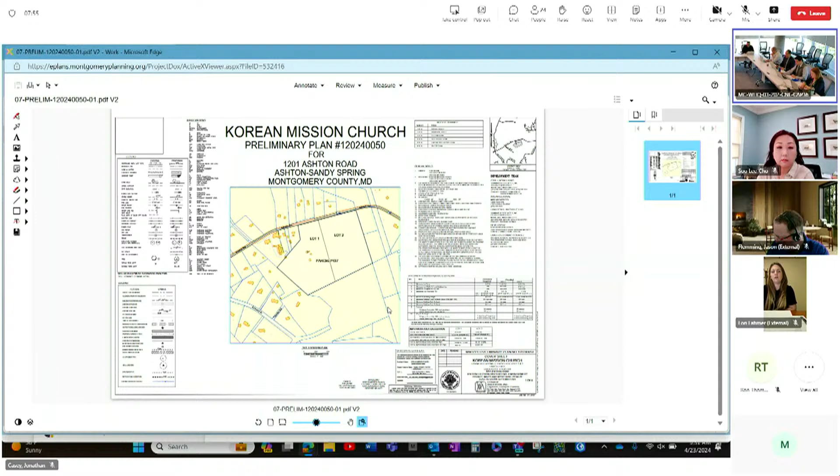Good morning. As already stated, I'm Jonathan Casey with Up County Planning. This is Korean Mission Church. The property is located on 108, almost to the Howard County line. Just a quick visual - this application is to subdivide the existing property into two lots, one for an existing house on well and septic, and one for the Korean Mission Church.

First off, I want to clarify on my comments, and in general, that the daycare use associated with the church does not require a conditional use, contrary to my interpretation. DPS, I believe, is on the line, and they can speak a little more to that if you'd like.

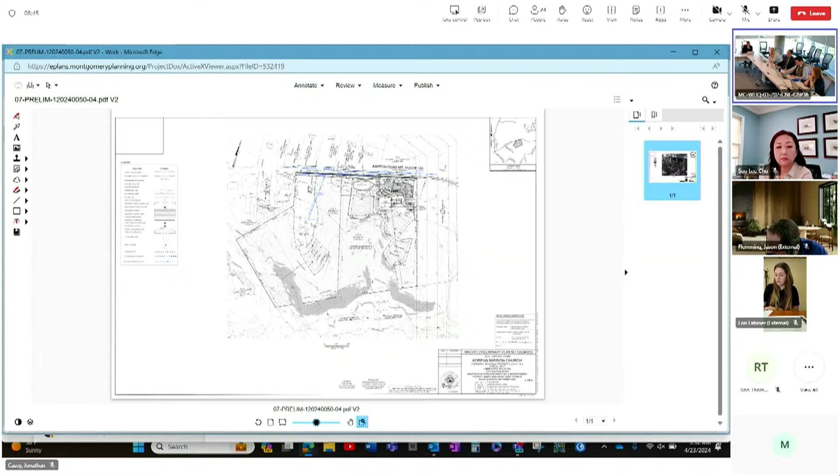It's pretty straightforward. The existing house is being retained, new septic established, and then a new church built on this lot. I would say the two big ticket items are, one, the building placement. Staff is requesting that the building be pushed up further towards the road, and possibly shifting the pavilion area so the buildings are a little more prominent on the road. We do have some very preliminary sketches in the works right now - very, very conceptual - and I will distribute those in the next day or two.

The other item is the existing graveyard. There will be some additional work associated with that graveyard. As you go forward, you'll need to coordinate with Brian Crane and go through the process that's established for delineating burial sites.

With that, I'll pass it to, I believe, Sue will be doing the speaking.

You're on mute. Yep, I got it. Good morning. Sue Lee Cho with Bregman, Berbert, Schwartz, and Gilday on behalf of the applicant, Korean Mission Church.

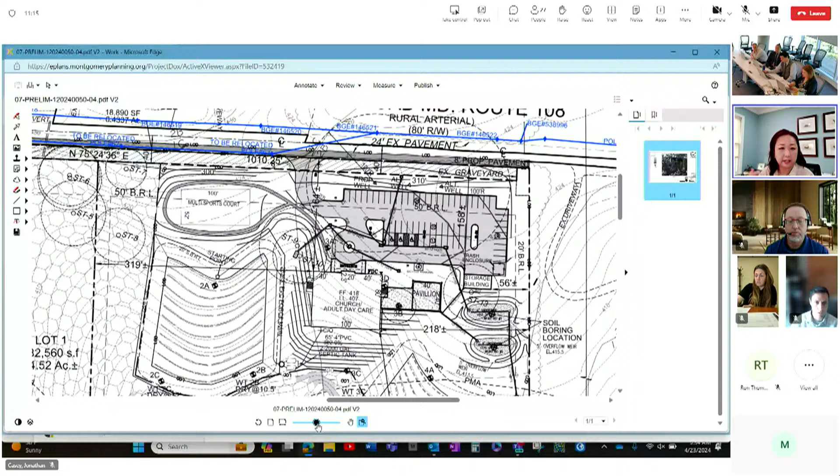On that issue, I'd like to say the team had reasons for the placement on the site, the building the way it is, and we understand the comment about trying to push it toward the street. The topography of the site allows, based on the placement, to minimize the height of the building, the church building, as viewed from the street. We believe setting it back from the street would allow for screening and would be more in character with some of the comments we're getting on the master plan about the rural nature of this area, trying to balance those interests. It would also allow for a basement level, a lower level below grade at the front of the property, but exposed on the backside.

That would facilitate the church use. As you push the building toward the street, we don't have that ability to use the grade to our advantage. As you can imagine, if you construct the parking lot behind the building, we run into the issue of retaining walls and significant increased cost of construction, making this project more difficult and costly to build. So there are reasons why the parking lot is located where it is, toward the street. But we understand the need to screen it and shield the view of the parking lot as much as possible. Those are our perspectives, but certainly we'll look at the sketch you all are preparing for us. This is not an urban environment, so we thought setting the building back from the street would not be as much of an issue in this part of the county.

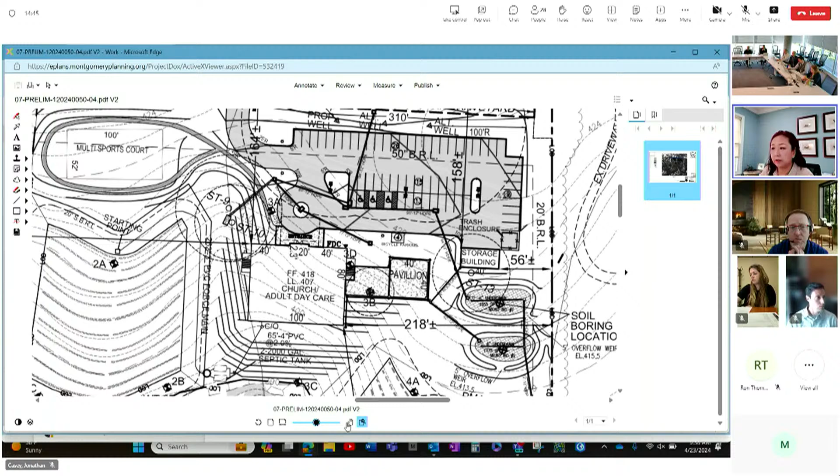Okay, great. The other kind of grouping of comments that we noticed, we just would like to use the time today to maybe start the conversation. We certainly will not conclude the issue. We noticed the transportation, kind of the frontage improvement comments with the side path, street buffer, and state highway comments - we are trying to reconcile some of them. The numbers we saw did not marry up exactly with each other on some of the comments. There was a 10-foot side path versus a minimum 6-foot sidewalk, that kind of thing.

So I don't know, Jonathan, if we should have a separate meeting to hash out the cross-section. I know your comments, you had a number of places where you said we need a cross-section. We agree. We need to come to terms with the cross-section.

Yeah, and I think you probably noticed there are a bunch of comments that repeated themselves probably 4 or 5 times. That was not emphasis added, that was just E-Plan's work. But yeah, we can discuss the actual cross-section. It would probably be best just to consolidate the meeting instead of having multiple meetings, but again, I can talk to our transportation staff and DOT, and we can work out the details as far as any conflicts that you may have seen, and then we can hash all that out.

I do have, I think I have Nick Dribbin, Lenhart guys. Are you guys on? Yes, I'm here. Okay, Nick, did you want to add anything to the state highway comments on the acceleration, deceleration?

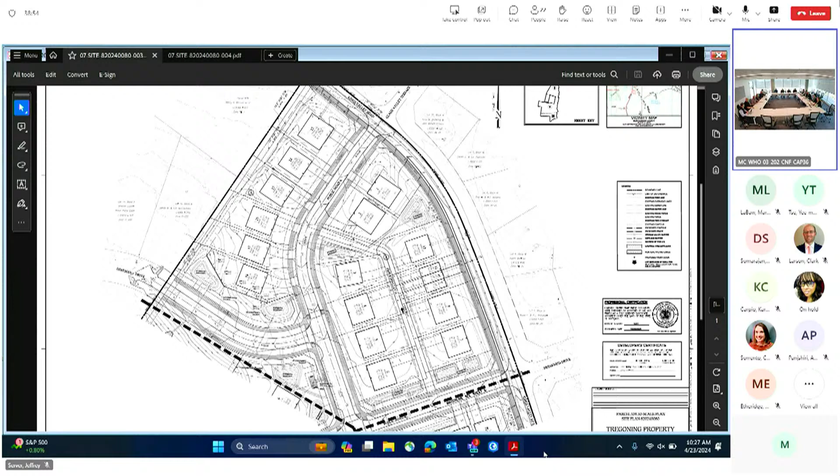All right, anything else? Good, I'll follow up. Good to see everybody. Thank you. Thank you all very much. Sorry, we're late.

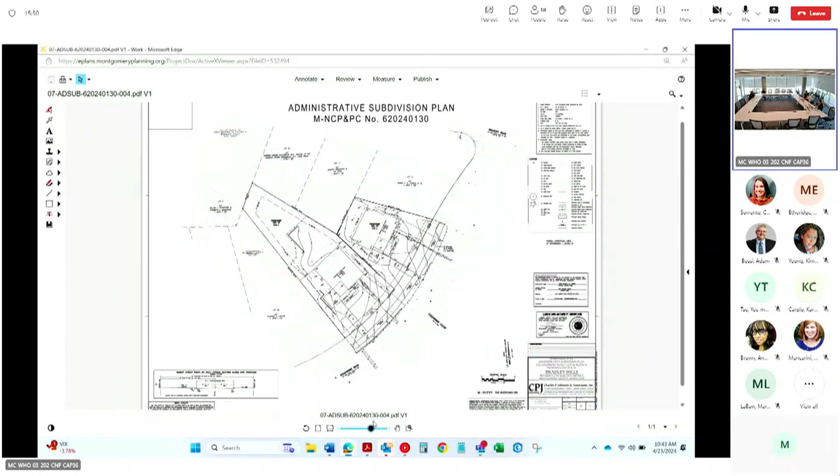Then there's an extensive letter prepared by the community that you received yesterday morning. Some of the concerns overlap with the DRC comments. There's some other points raised, such as exploring the extension of the side path to the corner. Our transportation planner has been looking into that with some of the other lead agencies. In general, some cleanups are needed, but I think the comments were pretty straightforward. Happy to answer any questions or get into any details you'd like.

I just have a few to go over here. We have talked in the past with other reviewers regarding noise studies. That's going to be probably a 4 to 6, maybe 8-week process to go through. So as far as resubmittal time, maybe an extension might be needed for that. That discipline seems to be very busy right now. We have been quoted 16 to 18 weeks from other companies, but that is in progress.

As you brought up, the main thing is the side path and the impacts to the specimen trees along Goldsboro Road. I need clarification on where that can go. Even moving it back, we're still in the structural root zones of those trees. Obviously, we want to save trees as much as we can. These are specimen trees out here. But even moving it back, I don't see how we're limiting the disturbance to those trees.

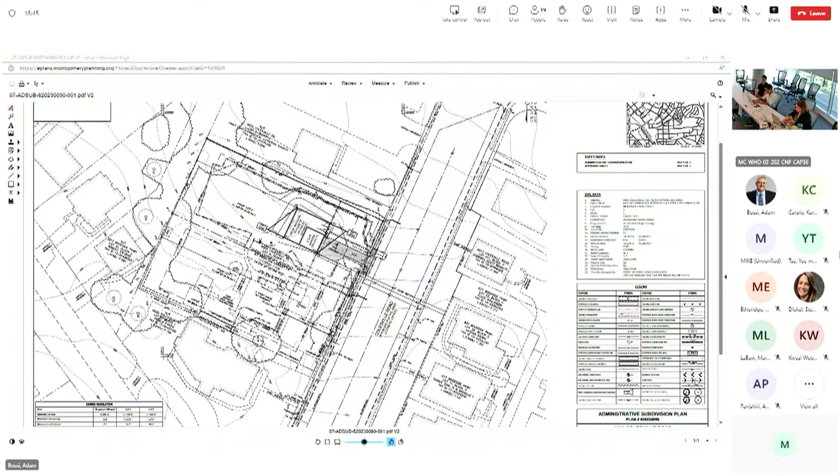Mike asks if Katie is available right now. Mike notes Katie Mancarini is in the meeting but doing double duty, so she might not be able to join at the moment. They agree to circle back to that question.

Second question is environment. There's a couple environmental questions. The first is regarding change mark note 3 about the removal of parking spaces. My question is, on this particular subdivision plan, would it be sufficient to just point out that the existing parking will be removed at the time of permitting, or prior to permitting, of any new future construction?

This is Marco Fistrati, the environmental reviewer for this project. The master plan has language about reducing impervious surfaces or increasing permeable areas. The site has extensive parking, and I think it's generally in the LOD. There's a prepared specification I could send you. Ideally, you would have that on the plan. That answers your question.

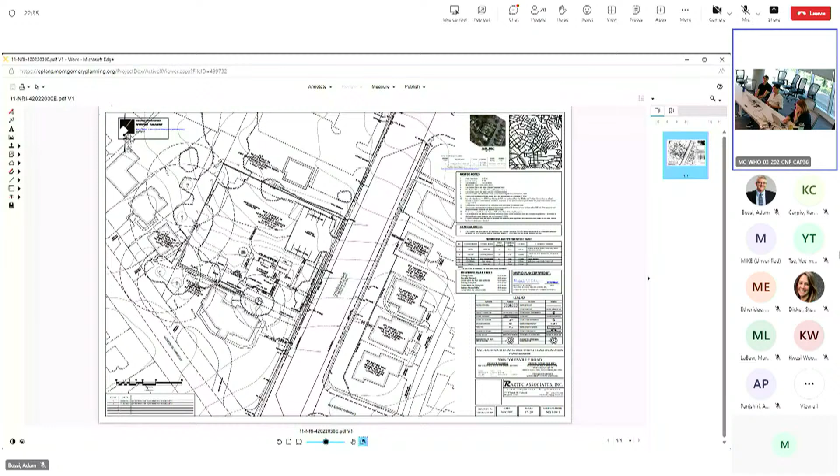The master plan also has language about applying urban forestry practices and exploring ways to preserve trees through the subdivision process. On the north boundary, in particular, that's where the 25-inch maple is, along with a row of cherry trees near the LOD as proposed. We'd like to explore some adjustments to the LOD or other measures that might help preserve those trees if possible.

So what would you like to see in terms of moving this particular plan forward—just show it on the administrative subdivision plan when we revise it? Right, as part of the plans they would ideally show the arborist recommendations and any fine tuning of the LOD or other measures that might be recommended. Okay, all right.

Hey Mike, this is Katie, sorry I missed the first half. It sounds like you have some questions about maybe the side path or some of the frontage improvements. Hi Katie, how are you? My question was regarding your comment about having, on Colesville Road—I know we have to do a dedication—an 11-foot side path and 8-foot street buffer. Given that this area is pretty well developed, how would that connect to existing facilities or improvements? How would that tie in? Is it more obstructive to have that, or I'm not sure what the end result would be. I just wanted your opinion and some feedback.

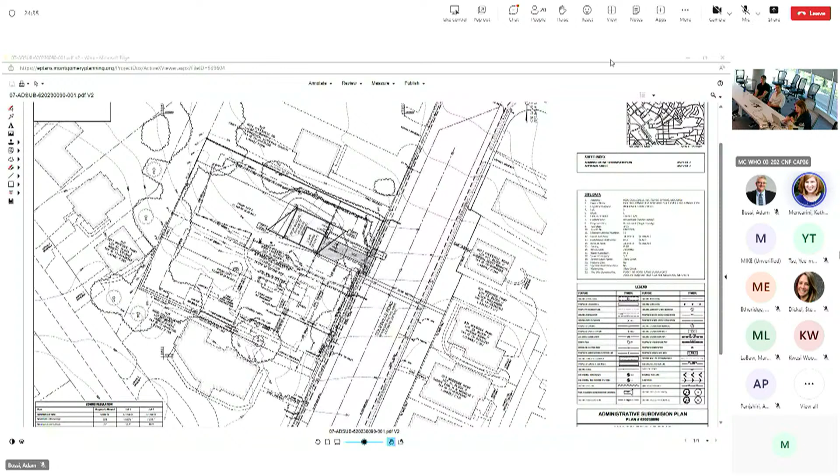Absolutely, this is a great question—forgive me, I might give you more information than you're looking for. In 2021 we adopted the complete street design guide, which set certain frontage improvements based on street classifications. Colesville Road does have a sidewalk today, but it's insufficient, and we consider it not safe and comfortable for the goals we're trying to achieve.

So when new development comes in, you have to make a finding for compliance with master plans, and the complete streets design guide is treated in that same way. And that's why the comment was made.

So what you would be doing is installing the side path, and it would tie into the sidewalk on either end of your property. So it does need to tie into the existing facility, but you would remove that portion of sidewalk along the site frontage and replace it with a side path. So we'd be looking for that on your resubmittal and how you're achieving that.

Okay, thank you. My pleasure. Thanks for the question. I'll get back to my next question about environmental.

Marco, you say a noise analysis is needed due to proposed residential use along a major roadway corridor. Right, per the noise guidelines for development in Montgomery County, when you're proposing new residential uses next to a busy roadway, there's certain definitions, but this certainly meets it. It's a major roadway and you're fronting right next to it. Whereas if you were a certain distance away, you wouldn't be subject. But a new house that close to such a major roadway, you're subject to the noise guidelines.

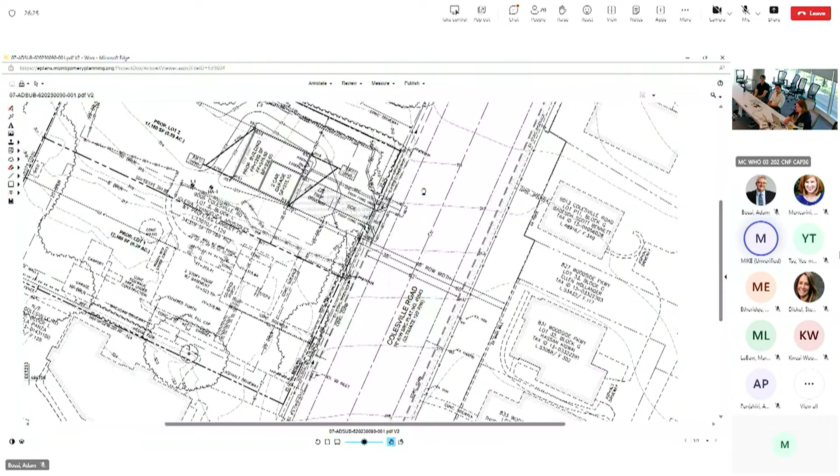Okay, is that something that's needed at subdivision, or something they could present when they do their permitting? It would be something we'd be looking at as part of the subdivision, and then there'd be a standard set of conditions, standard conditions of approval related to noise, recommended for the project.

Okay, my next question is from Adam. On your comment about checking maximum allowable lot coverage with residential infill, my understanding has always been that when you go through subdivision, the requirements you're supposed to meet are the regular zoning requirements, not infill requirements.

That would be in situations where, and this is my understanding, you're building or constructing something outside of the subdivision regs. Like, for example, if you don't need to go to subdivision and it's already a recorded lot, prior to 1978, I guess, recorded prior to 1978. Could you confirm that so we know where we stand?

Yeah, I think that's another great question, one that I don't have an answer for you right now, but I'd have to check into it and get back to you. I haven't had the question posed to me before, so I'm not sure what the answer is. If one of my colleagues does, they can feel free to chime in. Otherwise, I'll follow up with you on that one.

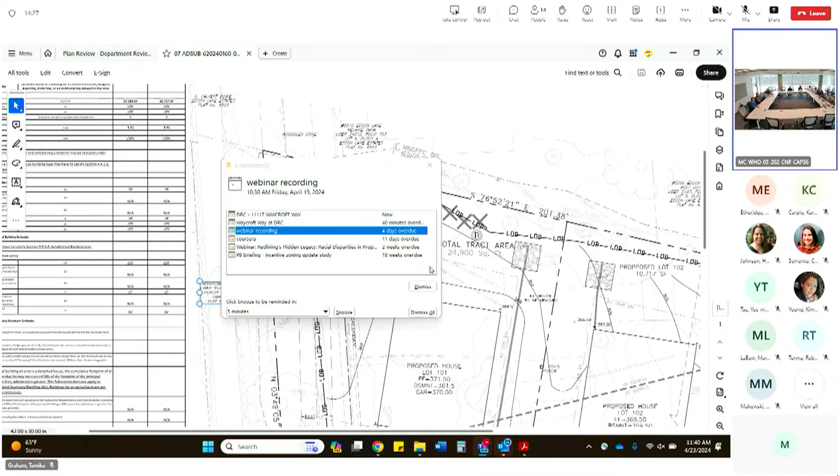I'll first start with the project schedule, just so we make sure we get the dates on everyone's radar. This will require another submission, due May 13th. For the agencies online, the letters would be due May 28th. And then we had a date saved for the planning board, which would be June 27th.

This is likely to be deferred to the planning board because of the comments we've already received, switching from the administrative review to planning board review. So June 27th. Just a couple of comments that I'll highlight.

From a zoning perspective, we do concur that what you're proposing for the 2 lots is consistent with zoning. You are showing that you're preferring to use the established building line instead of the front setback from the zone, which is fine, but we're just asking that you show the adjacent properties that you're using to establish that setback.

I think some of the other main things we wanted to highlight are with the transportation and the connectivity. So you probably saw a couple of comments from different folks about the ownership of the road. It is publicly owned, privately maintained, so we do need to have that consistent across all of the sheets.

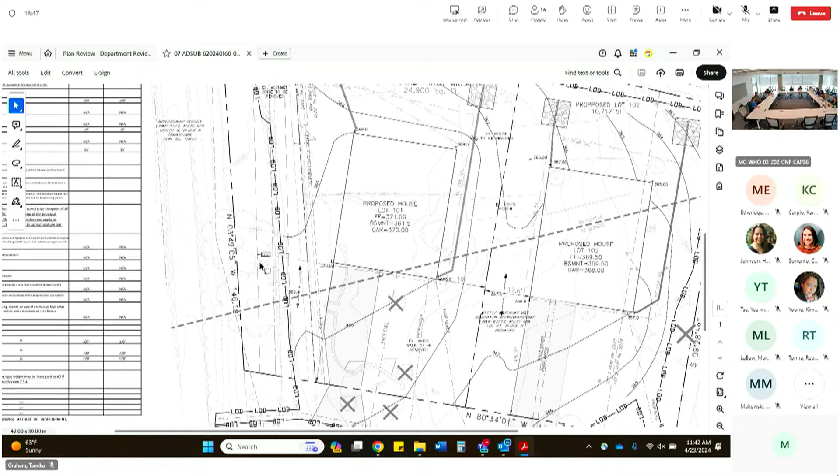We also noted that there is an existing stairway connection on the property connecting into the Bethesda Trolley Trail. It's on the park property, not on the subject property. Through this project, we would still like that neighborhood connectivity to be maintained—whether we're talking about an easement, where appropriate, connecting through the property to the park property, we would like to see that continue to be maintained.

You also saw some of our comments about capitalizing on some of the opportunities to improve the relationship between the 2 new homes with the street. So addressing the length and width of the driveways, trying to tighten them up or consolidate them, even if you can do that, also addressing the tightening of the driveway aprons as well.

We also had some comments—and I know this is a little bit beyond the lots and bulk controls for subdivisions—but we would also like you to consider how the front of the homes speak to the street. So shifting the garages back to the rear, making a front porch more prominent, things like that, as you know, already heard from members within the neighborhood. I think if you can illustrate or communicate what you're planning to do from that perspective, it'll really help go a long way for the community to understand.

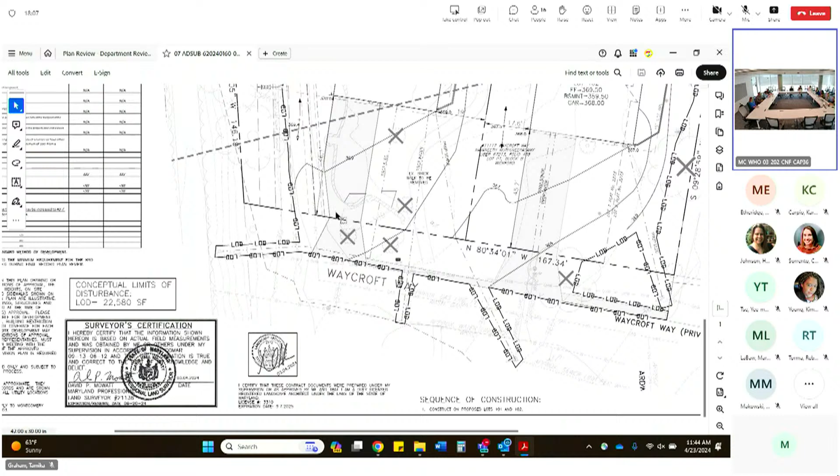Did we do that at the board, or because we don't want to get into detailed footprints for a subdivision? No, we understand that's not a submission requirement for this application type, but if you have an idea of what you're planning and intend to communicate that, I think it would be helpful. Okay.

I think those were some of our high level concerns. One of the other things, along the lines of trying to get whatever other information you have out to the public—if there's an active community association, that might be an opportunity for you to share that.

The applicants have met with the HOA—these are the two applicants. And the HOA also posted the notification list on their website, so people are very familiar with that. I believe they almost every day emailed out for people to respond—not a website, a listserv, I'm sorry. Yes, they emailed a couple of times and even had your contact published.

So that's been good, they have met with the HOA early, even before the pre-submission, regarding the February project. Okay, that's great. Yeah, and there was confusion on the roads because when you come in, it actually says private drive, no trespassing. When you enter the community, it says private road. So now we do understand that it's a public road, privately maintained.

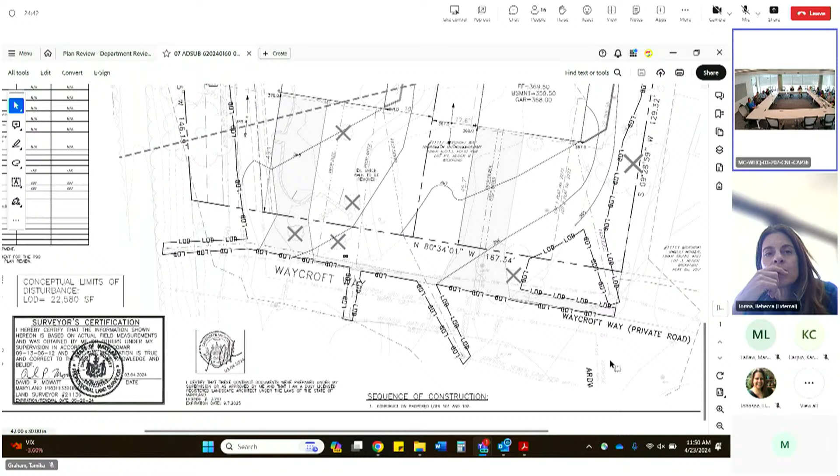Yes. There's about a 14-foot grade change at the end of Waycroft to the Bethesda trolley trail, and it's also park property. What we wanted to point out is, I'm not sure if we can pull open an aerial that you had earlier. If you zoom out a little bit down to Golf Lane there's one way in if you zoom down a little, right at the end of Golf Lane is actually the ADA access for the community into the Bethesda trolley trail.

So I don't necessarily agree that there's a connection need at the end of Waycroft when you have one at the end of Golf. I just wanted to point that out as well. Where's Waycroft?

It's quite a distance, less than a mile, to break down the block for pedestrians. But only half the community would use it, so when the community comes in, they would have to decide: do they want to go up to the connection you're asking us to install?

Or would they go down to the one that's already existing that's ADA? I don't think we'd be able to get ADA access, that's going to be the issue. And I don't think Parks is going to allow us to put a set of stairs on their property. That's where I'm starting to get stuck, but it was worth considering and exploring. We would like to see the connection, but if it's not feasible, that's fine.

That's why I was trying to understand, are we expecting that to be ADA, a set of stairs? I don't think ADA would work. I don't know if Henry's on, but I talked to Henry. Is it Parks property? I believe it is, the Bethesda trolley trail, I believe it's Parks owned, so it'd be a Parks permit. I thought that connection would be helpful. Henry's with Parks, I don't know if he's on the call, but I think it's worth looking into.

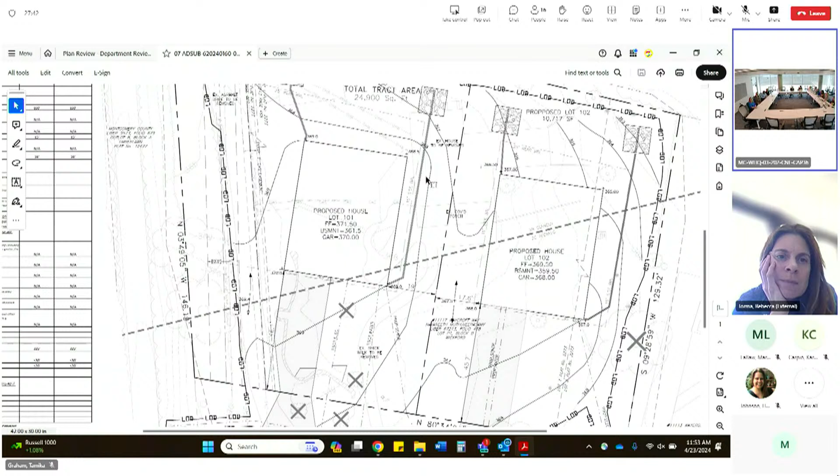Where would the easement be? Well, if you go back to the drawing, Tamika, there was a request from Waycroft to run the easement. I apologize, why we don't have the stairs on the park property - one of the requests was to have a public easement from Waycroft to the existing stairs that are on the park property.

So basically parallel to our property is what the request was for. Maybe I can highlight that in a drawing to put all of this together and show what our concerns are with it. And maybe we can point out where the ADA access is and some dimensions, maybe there's a bit more we can put together for that.

So does Waycroft end and then it becomes Parks property? Waycroft stops, yeah, basically at the western edge of the driveway that we have shown. It just dead ends right there, and then there's basically just lawn, trees, vegetation down to the park property. The set of stairs you just mentioned, is it at the end of Waycroft?

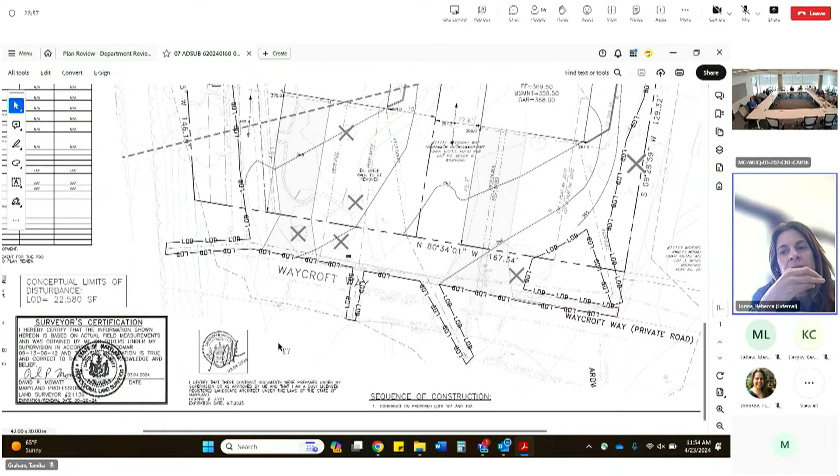I could walk up there and point to it, but I don't think Rebecca can see me. I mean, I see your property, so Waycroft dead ends basically. Maybe, I don't know if you can see me or not, but this is the edge of the county right, at the edge right here, this is park property, this direction.

The edge of pavement for Waycroft stops here, that's two-thirds of the way up, and the steps along Waycroft are along the private property up here, almost at the end. Right, if you keep panning up.

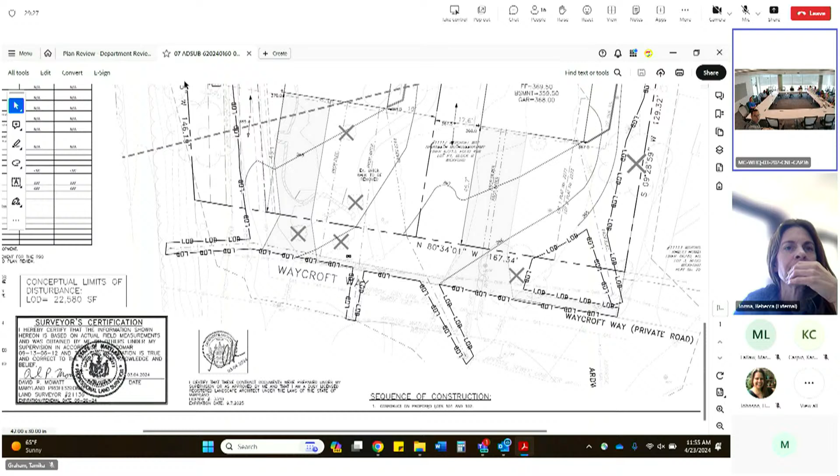So the request was to possibly have an easement along the edge of our property, which I also want to talk about - some more easements that we need to figure out. So that was one of the requests, to possibly have a public easement or provide access from the end of Waycroft, so maybe there's, if I understand correctly, two different ways of looking at it.

I think the intent of the comment was to try and make a connection, some sort of connectivity. If there's concerns and limitations, I think we just need more information on why that should be accommodated.

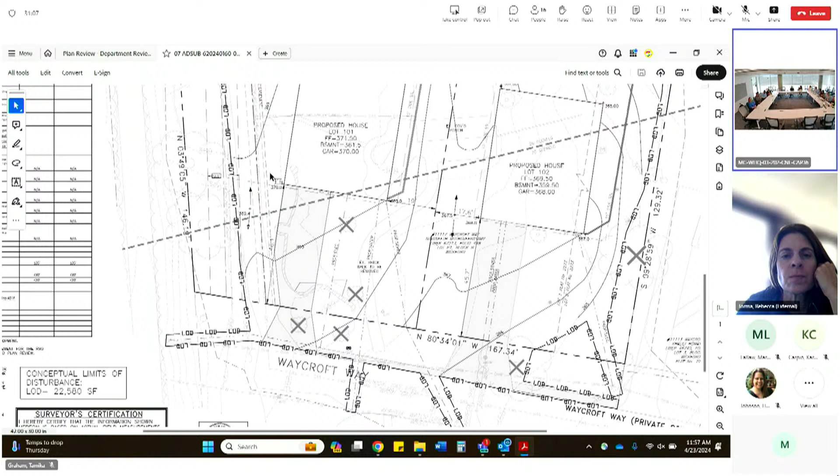I think we usually schedule these the following week, or am I wrong? It is the following week. Can we schedule it the week after that, in 2 weeks? 2 weeks is DRC. Because the pre-DRC is the opposite week, Monday, it'll be next Monday. I don't know that we'll have enough time to get more information, so that's my only concern. But send us an email with the information and question, and we can schedule something outside of that if we need to. That would be helpful, because we're going to have to file an extension at that point, which I'm sure you guys already know. That's one of our major concerns, how we would resolve something like that.

Is WSSC on the call by any chance? Yes, so we have.

Not a lot of questions, but on the west side, where we're looking at the drawing right now, there used to be a section of right of way that was abandoned, and it's under the ownership of the applicant right now. There is a water line in that section of property, and there's also a gas line. The gas line and water line do not run parallel to each other or to the property lines. The gas line has a 10-foot easement associated with it. The water line has no easement associated with it. One of our questions is how should we resolve the water line running through the private property that is connecting back to Edson Lane? We're not going to be able to provide a standard 20-foot easement for that existing water line because of the location of the gas line and the gas line easement, so that is a conversation we will need to have.

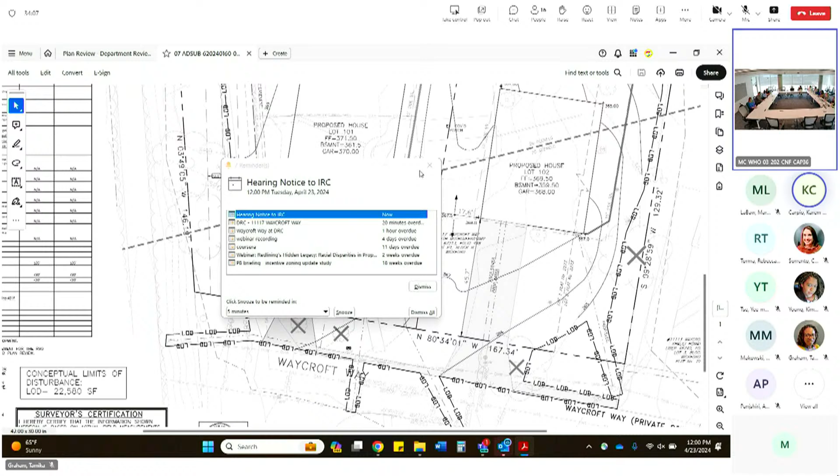I believe those are our big concerns, the same ones you guys have basically. Is there anything else that we have, Nav?

The driveway - if we cannot do 20, I did go through and look at the community, and there are several driveways that are 20 feet wide, including the neighbor across the street that was talking about. If we can reduce it, but if we can't, do we just address that as a comment? I think the reduction would be helpful. Okay, as it is.

Right. We're following up with the frontage improvements and then the connection. It sounds like we're not going to use next Tuesday's scheduled time, so I'm wondering if we can figure out when we're going to talk about that. That'd be helpful. We could turn around the sketch pretty quickly, but I don't know if you guys would have time to talk about it before Monday.

Rebecca, what would work for you? Christina, this is a T.

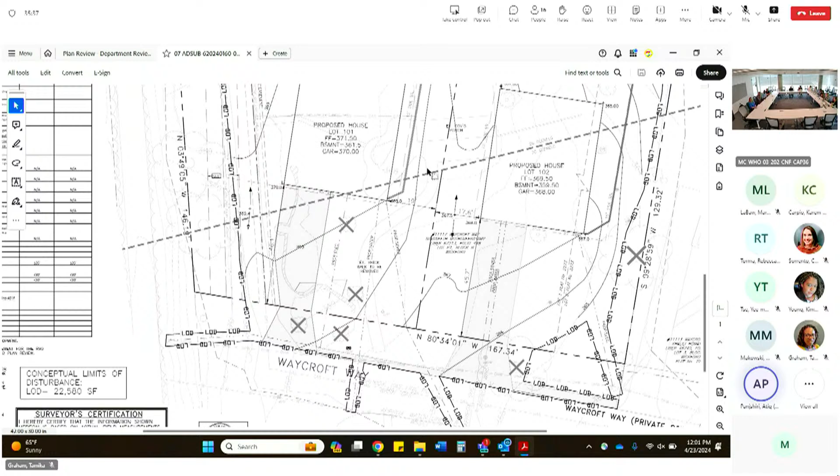Can I ask a question about the WSSC easement? Sure, what was that easement supposed to be? I'm not really sure, this is a T from DPS. It is an existing water main. There's an existing water main on the private property that does not have an easement, and we're anticipating the need for an easement as part of the platting process.

We're trying to resolve that the water line is not going to be able to sit within a 20-foot easement in the center of a 20-foot easement. We think it's going to be a little unique, but constrained by the western property line you're looking at right now, and also the gas line that is east of the water line. We could possibly pull the color-coded utility plan, that would maybe have it.

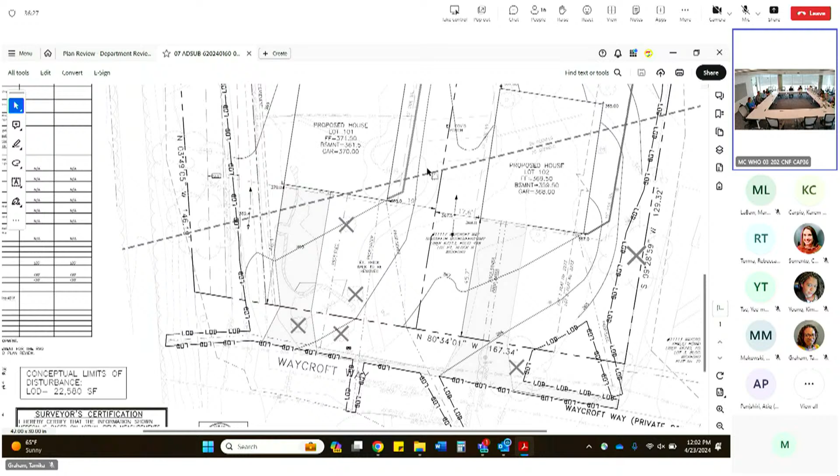Yeah, that will help, if we have time still. I was looking at the sewer line, looks like it's diagonal. No, this is the water line. Yeah, it's the water line. I don't think there's sewer. There's no sewer on the subject property.

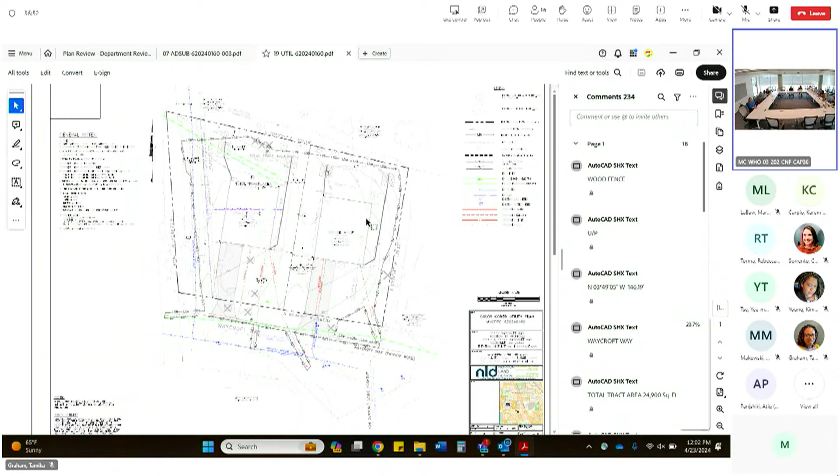Yeah, if we zoom in on that western side. No, I was talking about the connection. You have an LOD around the sewer in the pavement section that's diagonal, right? That is, yeah. Is that permitted? That's because the sewer line ends right there. Right, I didn't know if we allowed that or not, I thought it had to be perpendicular. Well, we prefer perpendicular, but if it's existing, it's not a big deal. We might be able to straighten that up.

So what you see in purple is the water line running north to south on the subject property, and to the east a little bit is the existing gas line, also in purple. We're also showing that 5 foot on either side is the existing gas easement. The water does not have an easement associated with it. So we were asking, how should we resolve knowing that we're going to need to provide an easement for that water line? Right, okay, and you notice they're not running... Yeah, the gas line is not parallel to the water, and the water is not parallel to the property line. So it's going to be a little bit screwy all through that whole section.

My concern and my misunderstanding was that the easement is not needed within the public right-of-way, even though it's not maintained at this point by the county. Regardless, it's a public right-of-way, and they don't need an easement within it. We're talking about on the subject property though. Yes, I understand. Oh okay, yes, that's right. So when that portion of right-of-way was abandoned, there were no easements created as part of that abandonment process.

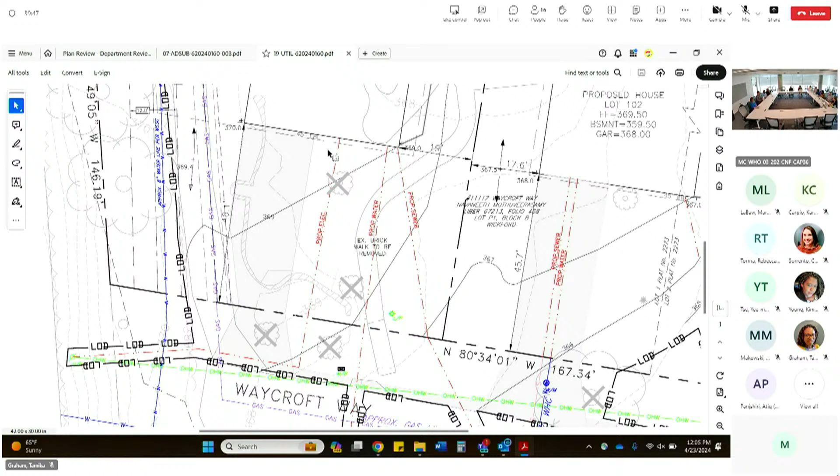So we can get a sketch to you guys probably by the end of the day tomorrow, then I guess. Okay, yeah, perfect. All right guys, I think that's all we have. Thank you, great, thank you.